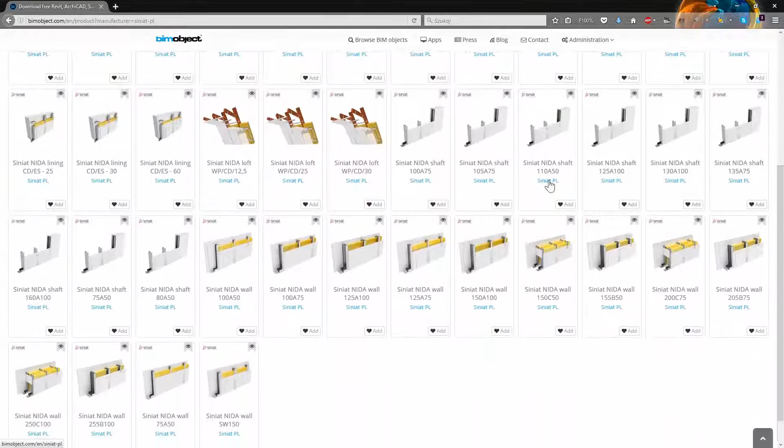Now I'm able to see all Siniat.pl products available on the portal. I will choose one example wall, this one 100A75. Here is the product page where you can find information, description, specification, links, classification and other data. We also prepared some nice 3D previews of these objects, so you can click the 3D button to see exactly how the object looks.

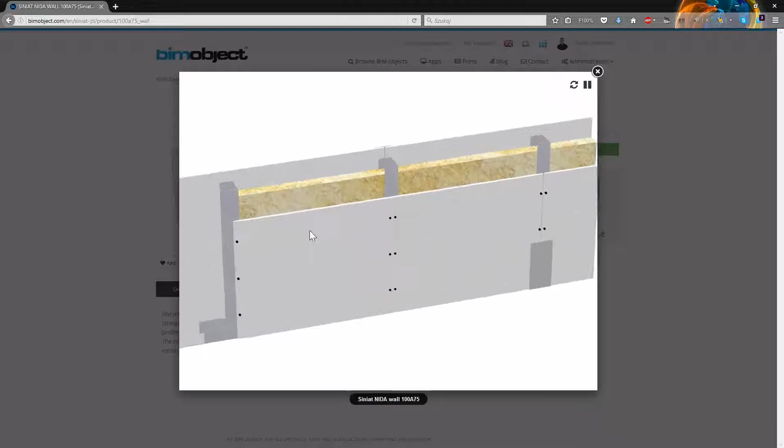Let's start with ArchiCAD. As you can see, we have 4 ArchiCAD files: LCF and GSM with detailed 2D drawings, and 2 AAT files containing the 3D structure of the wall. Right now I will download the AAT files. It's extremely important to download both the Siniat.pl additional attributes AAT and also the Siniat.pl NIDA wall 100A75 AAT.

Let's download the second example wall. I need to go to Siniat.pl products again, and this time I will choose this one, 150C50. As you can see, this wall also contains 2 AAT files, but I already downloaded the additional attributes file, so it's enough to download the second one, 150C50 AAT.

Let's go back to our ArchiCAD project. You need to select Options, Element Attributes and Attribute Manager. Then select the All tab on the right side, click Open, select the Siniat Additional Attributes AAT files which you downloaded from the portal, open it, select all elements in this table on the right side and click Overwrite. Please remember that it's crucial to use the Overwrite option, because otherwise those objects won't work properly.

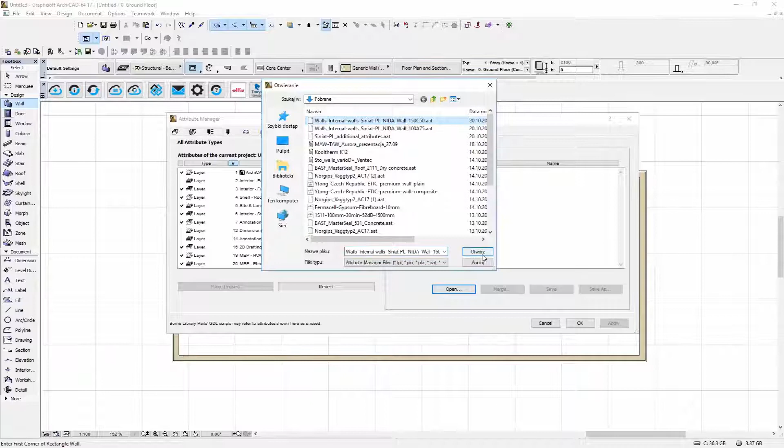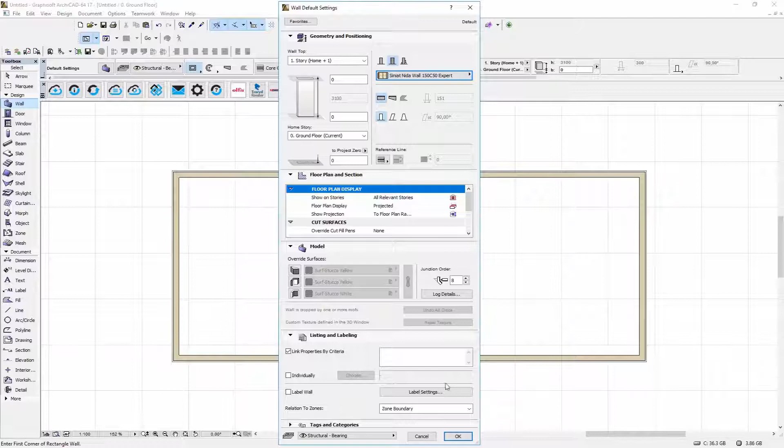For the 150C50, you need to again locate the file, select it, highlight all attribute types, click Append, and confirm with Apply and Create. Now let's check again if the wall has been imported properly. Here you can see we have different types for the 150C50 and 100A75 walls.

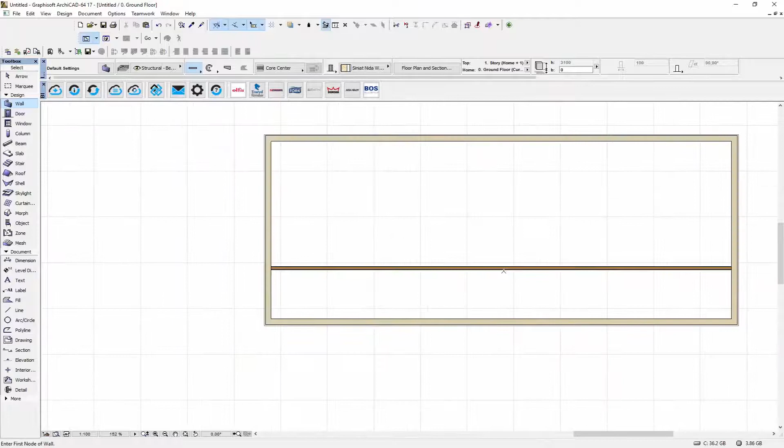Now let me draw some internal walls using the imported structures. So here is the first one. Let's select it and change its type to, let's say, 100A75 Expert. I will draw some additional internal walls, one in the middle, copy it to the left, and a third one on the right side. If you would like to see the connection details, you can always zoom in to see how it looks in the corners.

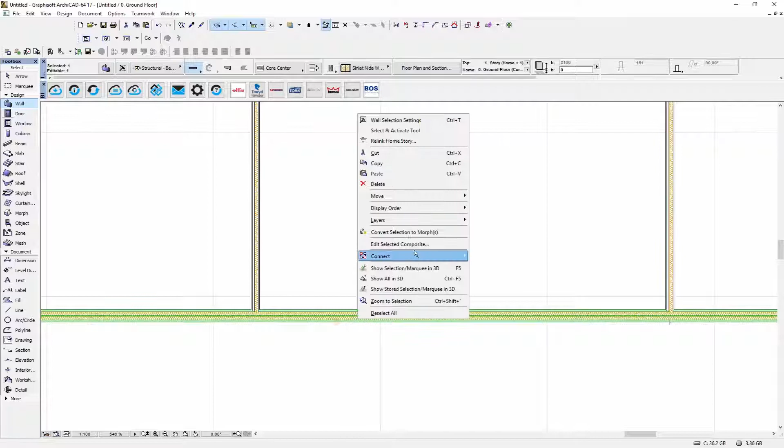You can also modify the structure of the wall by changing the thickness of some layers. You need to select the composite, select the layer which you want to change. In this example, we change the airspace from 1 mm to 100, confirm with OK, and you can see how this wall looks with the bigger airspace.

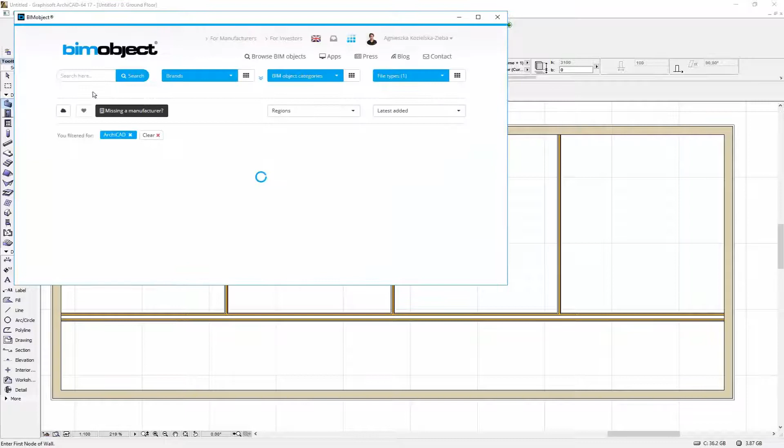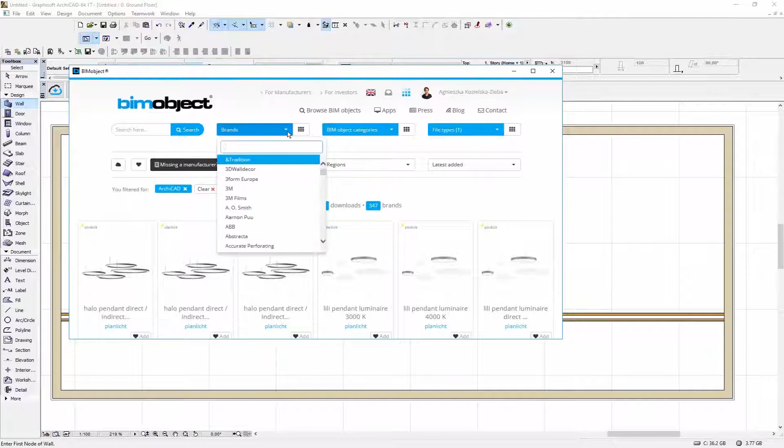For some Siniat systems, we also prepared other objects which contain detailed 2D drawings. I'm using my BIMobject application for ArchiCAD to locate those files, so I need to select the wall and download the LCF file, and also repeat this process for the GSM file for the same wall. If you download more objects, you don't have to download LCF again — it's enough to download it once and have it somewhere in the library.

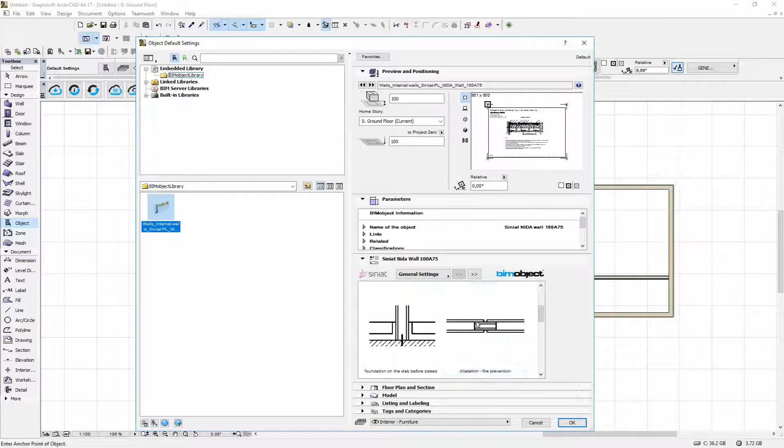If you downloaded both files, you can go to the Object menu and select this particular object from the library. You can modify its properties by changing the detailed drawing in the General Settings tab. You can modify the color in the Appearance tab. And you also have some links to the manufacturer's website in the third tab, Product Pages.

Here is how it looks on the manufacturer's website. And in the last tab, you have some social media links and some BIM Object information.

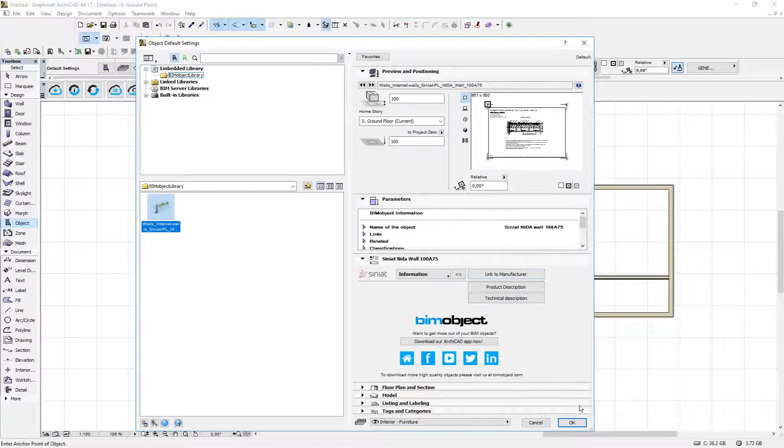If you place these drawings in your project, you can see the connection details, some additional information, and the cross-section of this wall. In Revit, you can import predefined walls from the BIM Object portal, or you can choose a more convenient way and use our BIM Object Revit application to download them directly into your project.

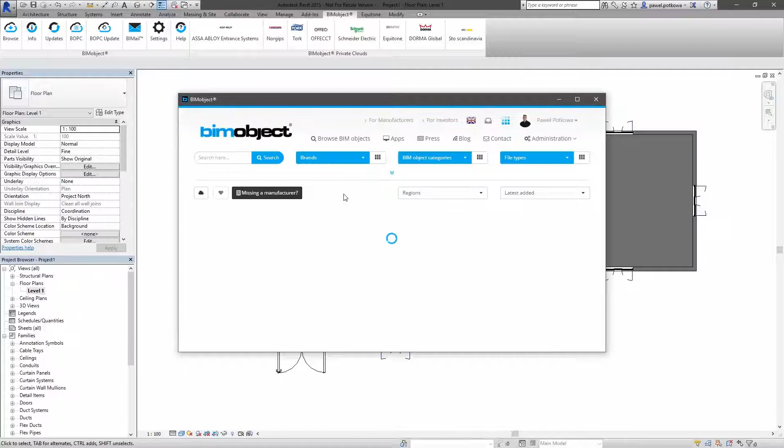I will choose the second way. Click the Browse button, filter the content on the portal again by typing the Siniat PL name in the brand field. And here we have our objects.

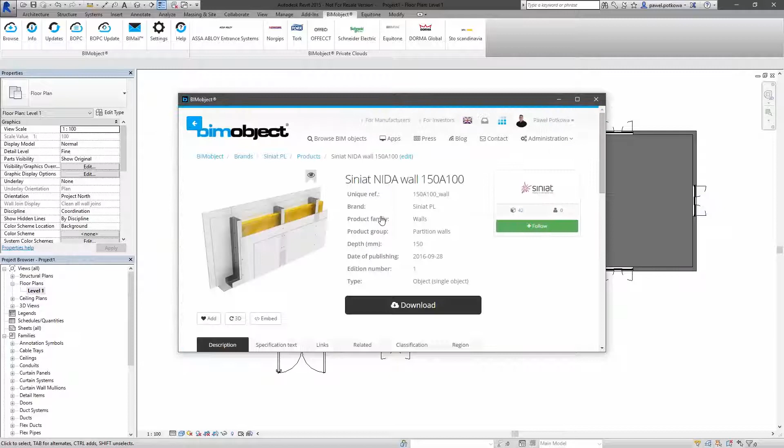I will choose one example again, this one 150A100. You need to click Download, select the Revit file, and wait a second until it is downloaded into your project.

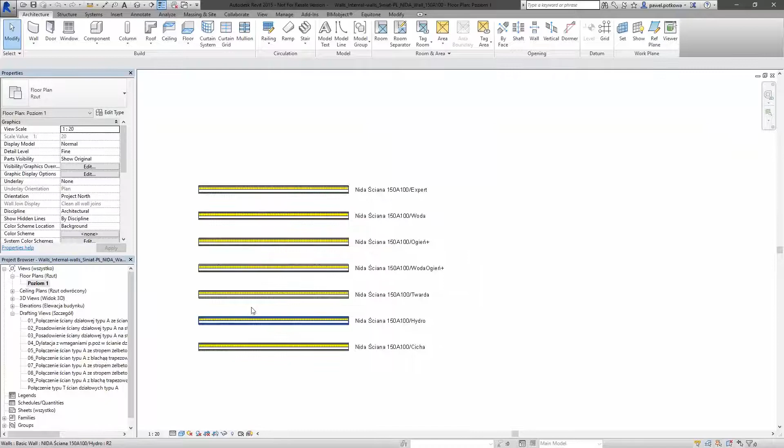After the download process, Revit opens the walls in a separate window. Here you can see some 3D layer structure of these walls. You can also switch to Level 1 to see the details in 2D. And we also prepared some detailed drawings with the cross-section and some connections of these walls.

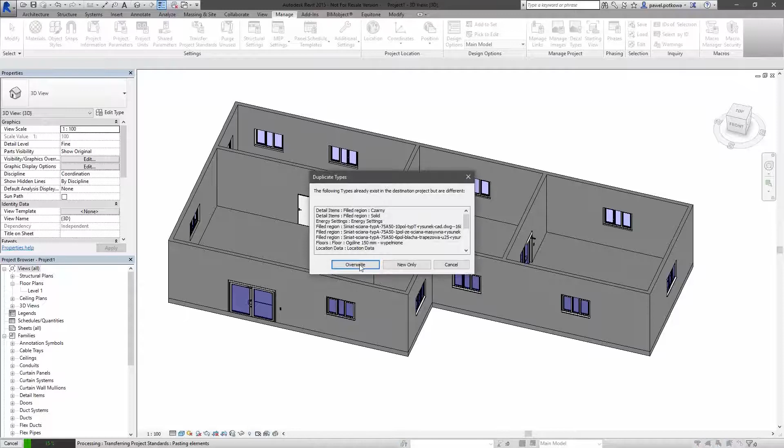If you would like to import these walls into your own project, you need to switch to this project, choose the Manage tab, and select the Transfer Project Standards icon. Now you need to select the project containing the standards which you want to copy, check all, confirm with OK, and press Overwrite to overwrite the values which you have in the current project.

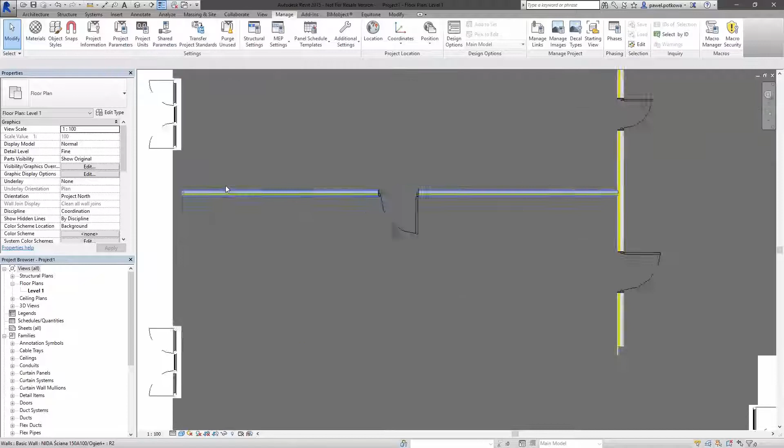If you want to change any of the walls which you have in a project, you need to select it, select Properties, and switch it to another type. Let's repeat this process for some different internal walls. In 2D you are able to see some details of these walls, layers, and some connections between them.

If you want to get more information about these solutions, you need to select the object, choose the BIM Object tab, and press the Info button. Then you will be able to see the product page and get some additional information about this solution. That's all for today.